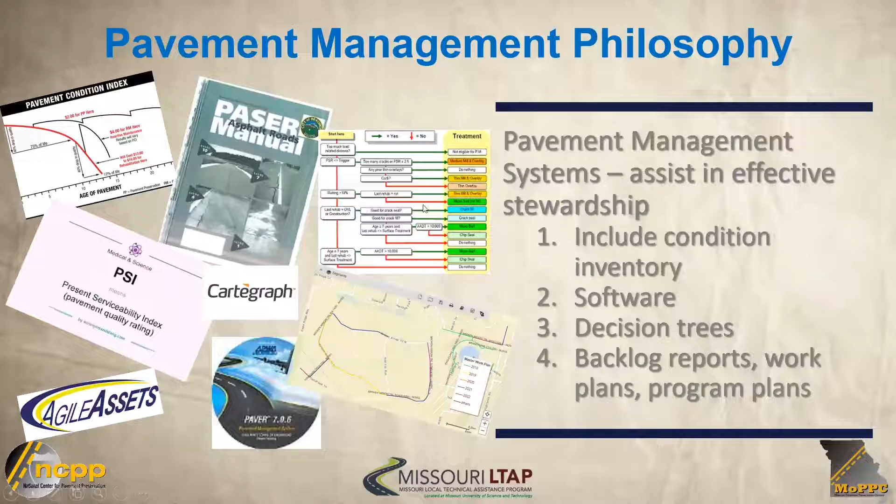In fact, in Florida, we already had a webinar to cover this exact thing. There's a lot here. For those of you who are low and moderate, just understand that there are certainly a lot of different systems, whether that's kind of the early PASER model, which is that 1 to 10 scale. You've probably heard of the 0 to 100 PCI, or pavement condition index. And then you've probably heard of some of these proprietary systems, or what APWA has, which is called PAVER, used to be called micropaver. So you're going to hear all about this, but it's really there as a tool to help you inventory the condition of the pavements. Now, some of these get into more of a decision tree, where you can build that out yourself. Some of them get into backlog reports and help you plan and program for the future.

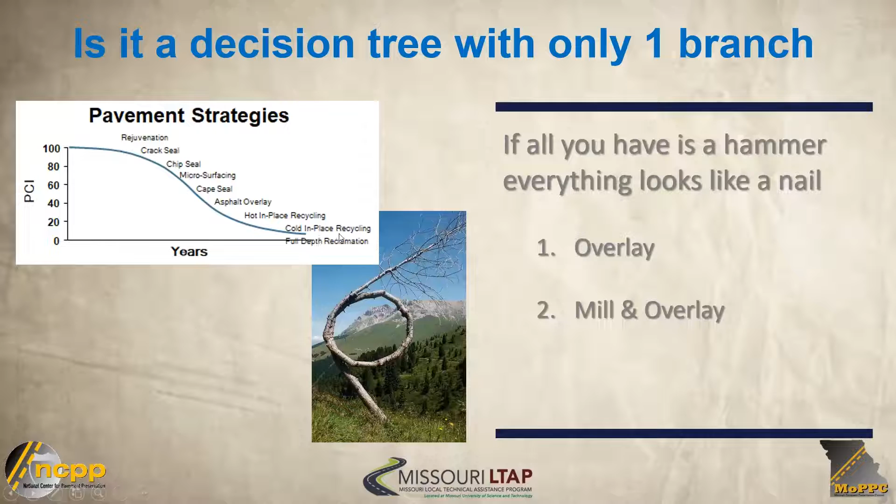Here are some strategies you might see along the entire deterioration curve. You'll see us talk about this curve - you get way up at the top where you have more preservative, aggressive strategies to preserve the pavements, all the way down to the bottom of the curve.

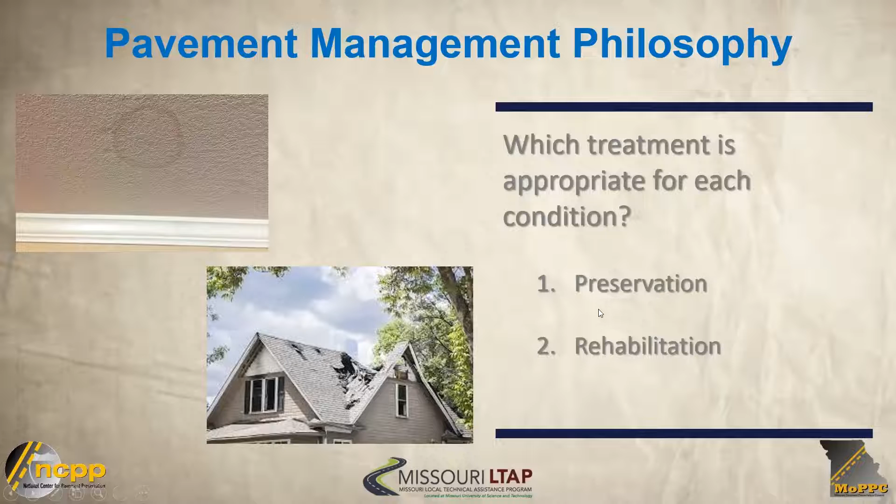So which treatment is appropriate for each condition? That's what we want to know. When is the best time to address a leak in the roof? Is it when you see a little water stain, or is it this situation? What we want to catch is right here - it's a lot less expensive, a lot less intrusive, and doesn't affect the public nearly as much. So that's where we want to live, putting a tremendous amount of effort into the preservative side. And then obviously we're going to have some where we have to do rehabilitation.

But it's something we all understand, right? If your kids bring home a 55, you know what that means - they're grounded. But you know what that means in relation to a 90. It also helps, in essence, not only with making sound treatment decisions, but also helps us communicate with elected officials, and we need to be able to do that.

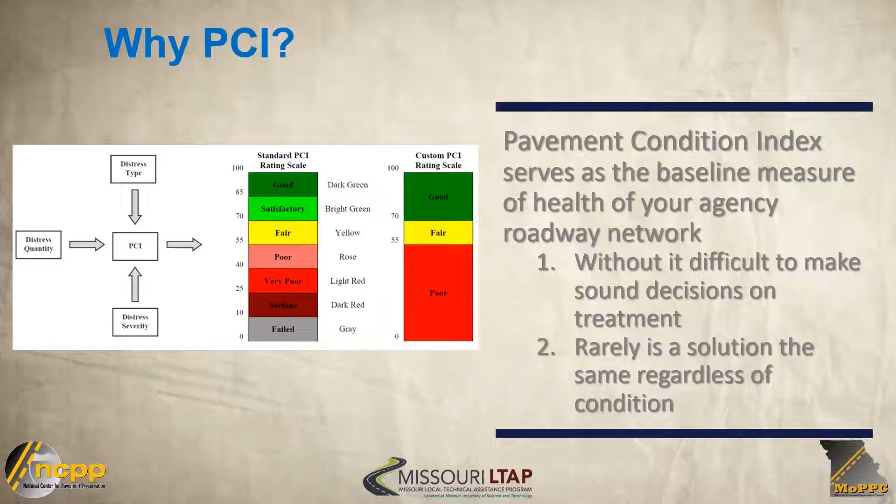That's very important. Rarely is a solution one size fits all - that's something I talk a lot about. I love this Peter Drucker quote: 'What gets measured gets managed.' That's what we want to do. If you're not measuring your network, you're really not adequately managing it. So one of the things we want to focus on is implementing specific measures and setting goals.

Know your paving cycle - it's one of the easiest things you can do. To calculate that, just take your normal resurfacing budget - let's say it's $1 million - and divide by the number of lane miles you have. And if you have to tell Mrs. Jones that her road, assuming the normal resurfacing budget, won't get resurfaced until star date 2163, then you know there's a problem.

You want to know your network level at all times, as much as you can. Then work with management and elected officials to set that minimum network condition target. Do you want to be at a 70? Are you at a 60 and want to get to a 70? You definitely don't want to stay at a 60 - that's the terminal threshold, which Larry's going to get into.

Then really determine the funding levels required to hit the targets. It's one thing to set a goal, but what we want to focus on is the targets to get to that goal. That's how we need to set that.

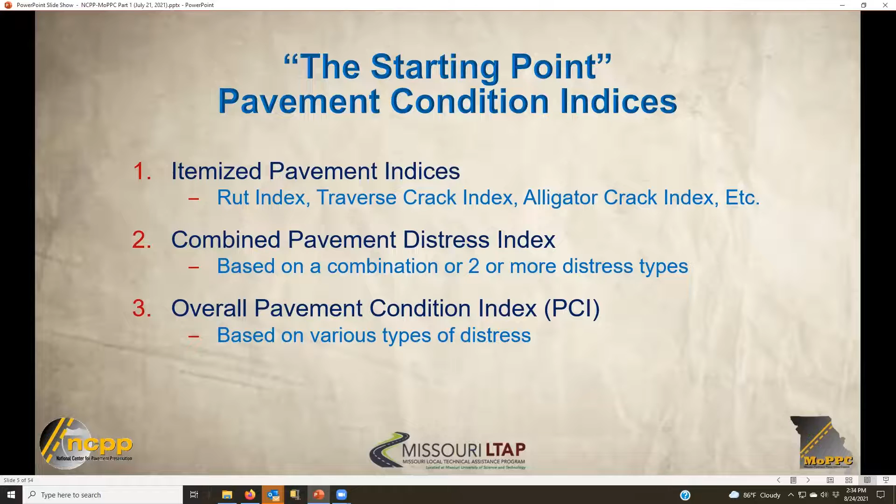There are rating systems out there. I'm not going to take away any of them, but some of them are probably a little outdated. For example, the PASER system was developed by the University of Wisconsin. I remember years ago going there and listening to how the PASER system was set up. I thought it was a good system to begin with, but as time rolls on, we got to look at things a little different.

Their rating scale goes from a 10 to a 9. They're saying no maintenance is required. Well, maintenance can be required from day one. So to say you'll never get maintenance if the road is new, that's a misnomer.

The other thing is they're saying cracking and minor patching, that's an 8 to a 7. Well, where does that all fall into? Because that's a little different. Preservation is about the midway point in that system, a 6 to a 5. Well, you're not going to get ahead with preservation if you wait until the road is too far deteriorated. You want to do it early. So, that system had a few problems.

Then AASHTO came up with a couple systems. They came up with a PSI and a PCR. The PSI was based on ride and rut and cracking and patching. Well, there's a little bit more to it than that. You're talking about relegating the roads to just a few numbers, and that was a 5 down to a 0, which a 5 is excellent. 0, as I have on the screen here, it's essentially impassable. Well, we don't necessarily have that many roads that are totally impassable.

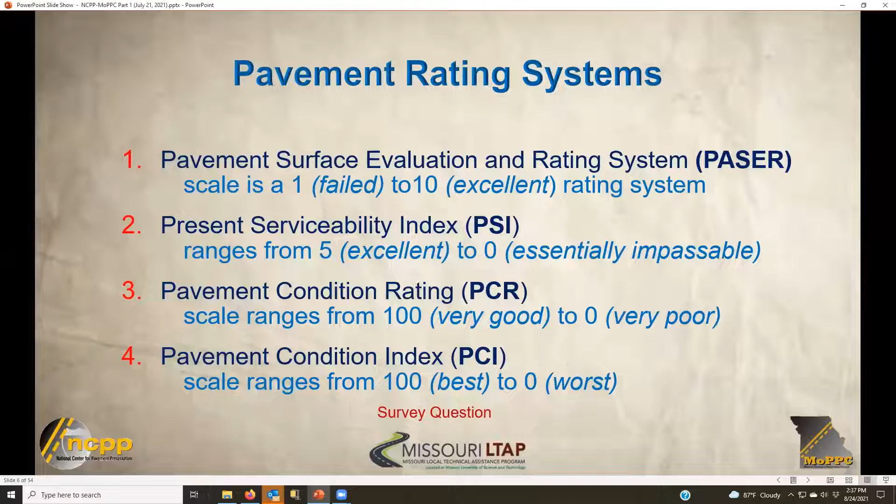Okay, let's move on, and we'll come back to that question in a minute. Let's talk about the advantages. Oh, are we getting some questions up there? No, you're fine. Keep going.

All right, let's talk about some of the advantages of a pavement rating system. Obviously, a lot of us can remember an awful lot of things about our roads. When I was with the state of Michigan, there were an awful lot of roads I could remember the condition to, but you start thinking about it, you lose track. So you got to have some way to rate those roads.

So anyway, let's talk about the whole advantage of the rating systems. Better communication. We can set up a threshold value for when things are starting to go to the point that we're at a point of no return. That's called our threshold, and we'll get into that a little later. We can sort and rank our roads. We can also rate the deterioration performance. It helps us track some of the designs.

There's a lot of reasons to have a pavement management system. In the old days, maybe you could write it down on the back of a piece of paper and keep it in a desk drawer. You can't do that anymore. We have just too much to take care of, and there's just no way in the world that you could possibly be able to rate your roads with a system of scratching on a piece of paper anymore. So you've got to have some sort of rating system, management system.

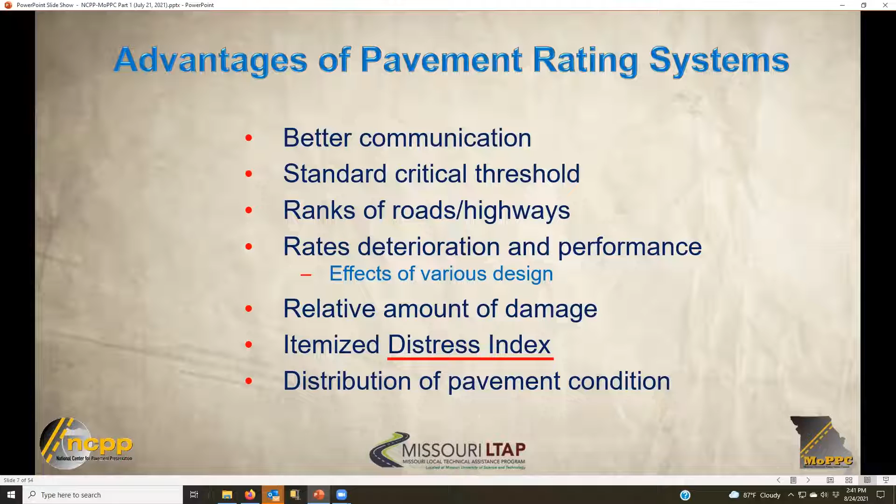Again, they all use some sort of itemized distress index. That's so important with every one of them. And we're going to use them in this new approach I'm going to show you.

Here's a problem that you've all faced. You go to a city council meeting and you're trying to describe your needs to the council. These are the folks generally that are holding the money, and everybody wants a share of it. You have police and fire, water and sewer, development associations, and yet you're trying to describe your needs to people that really don't understand what you're talking about. And even once they're educated, the election cycle is such that they change quite often. So you've got your back to the wall trying to get your point across, but it's very, very difficult to do.

And that's the city. Now you go into a county and you're facing the same thing. These are the folks holding your money, and they're elected on a short-term basis most of the time. People want funds for new roads, but they also want planning studies. They want law enforcement. They want money for parks and reserves. It's a never-ending struggle. So how do you communicate with these folks without getting the deer in the headlights look?

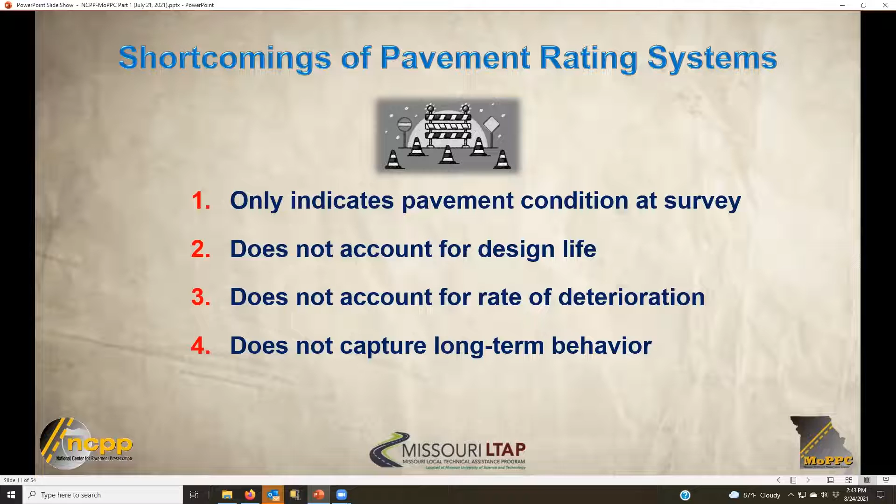One, it only indicates the condition at the time of the survey. It doesn't account for your design life. It doesn't account for your rate of deterioration. It doesn't account for long-term behavior. And those are all things that people want to know. So that's one of the problems with our existing systems.

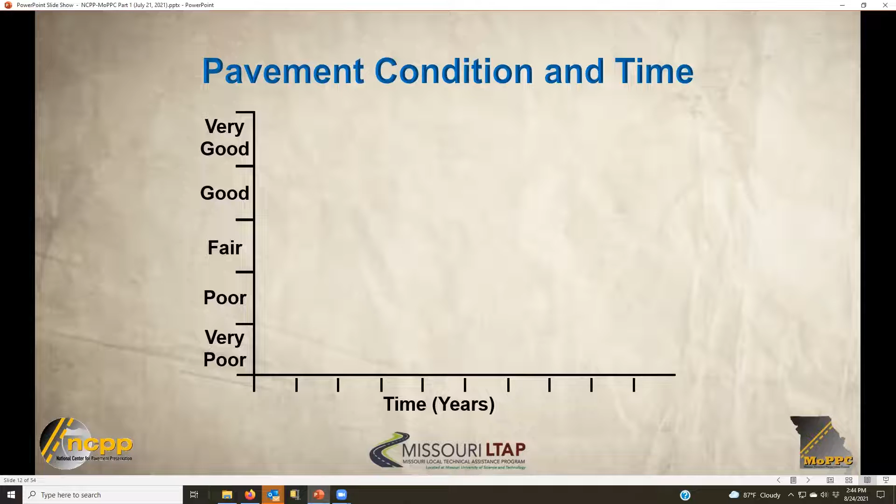And yet we can look at a typical deterioration curve over time, and it starts to make sense if we look at it in a different light. Here's your typical deterioration curve. On the vertical axis you have everything from very good down to very poor, and the time span in years is along the x-axis. But roads don't all take this form. This is just something somebody drew up, but every road acts differently.

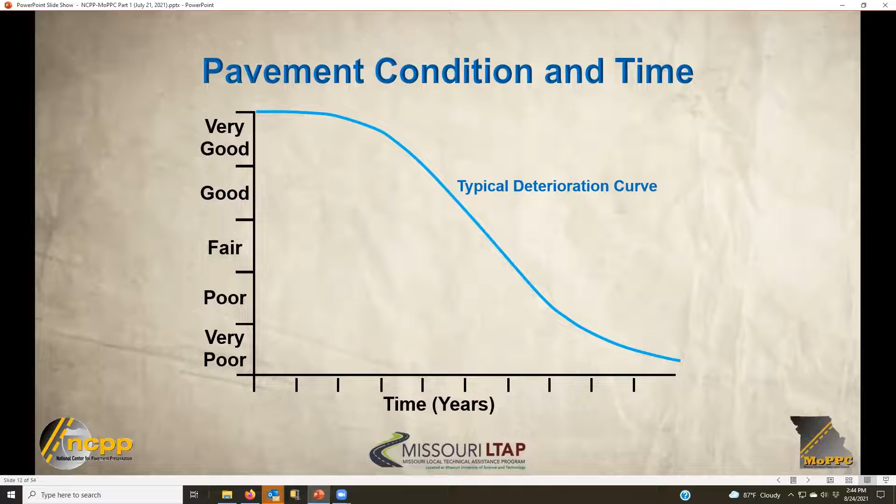We're getting some answers here. Let's take a look at it. Give you another couple seconds to jump on. This is what you folks are dealing with on a day in, day out basis. Where do you put your money? Okay, let's end the poll. All right, well...

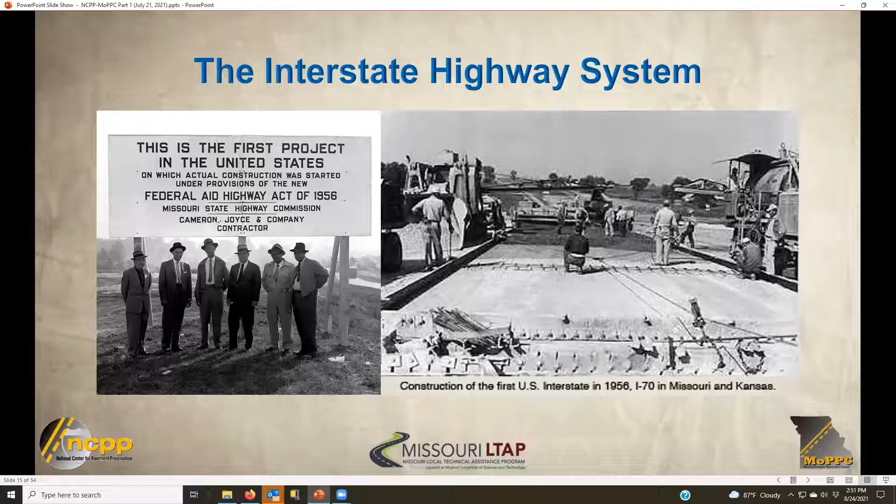Let's talk about lifespans. Everything out there has an average lifespan. People have an average lifespan. We tend to forget that roads have a lifespan as well. And it's important to think about this, but the only difference is that every living thing here, the life can be extended if we take care of ourselves and get proper medical care. But here's the other thing.

These can almost last forever if they're properly constructed and maintained. I had a discussion with Buzz Powell a number of years ago - Buzz is at NCAT, and many of you have heard of him, maybe some of you know Buzz, very nice individual. And Buzz was telling me that, you know something, our roads could last forever if we took care of them. Think about that - if we did the proper preservation techniques on our roadways, they would last forever. And right now, NCAT is doing some studies, and they're showing that preservation treatments last far longer than anybody ever anticipated, and they extend the life far more than anybody ever anticipated. So it's very, very important to think about our pavements as far as a thing that has a life, a pavement life. And here's the analogy.

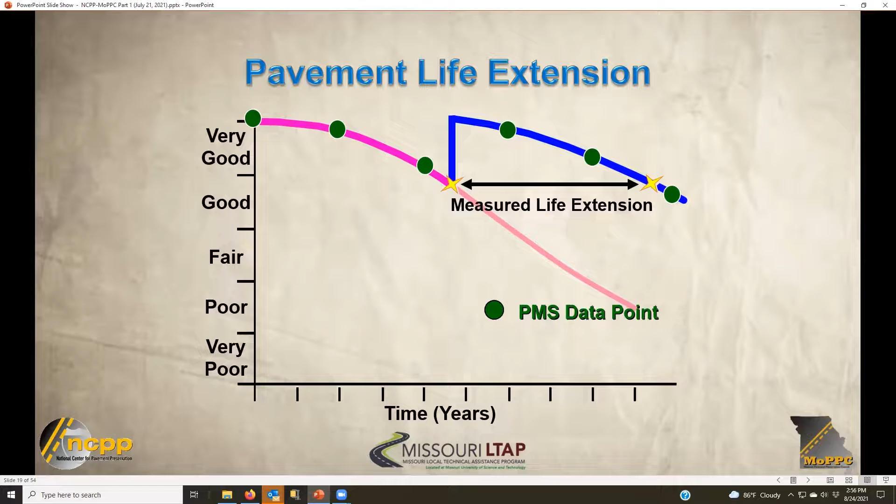So it's not a pie in the sky idea - it's really something that can be measured. Now, these have been measured, and you'll see the measurements and averages posted in this report. It's an NCHRP report, actually through SHRP 2, the Strategic Highway Research Program, the second part of it. And there's a report out there.

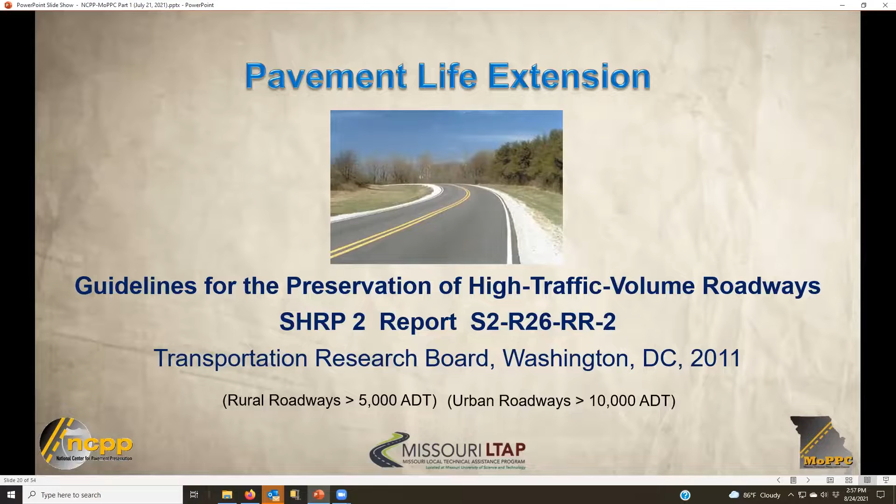Here's one of the points I want to make: your treatment life is not the same as your life extension. Your treatment may give you an idea, but think about a rejuvenator - you'll spray a rejuvenator on the roadway, and after they're gone you'll say, well, what did that do for me? I don't see any treatment life there at all, except it's just extended your pavement life another 3 to 6 years.

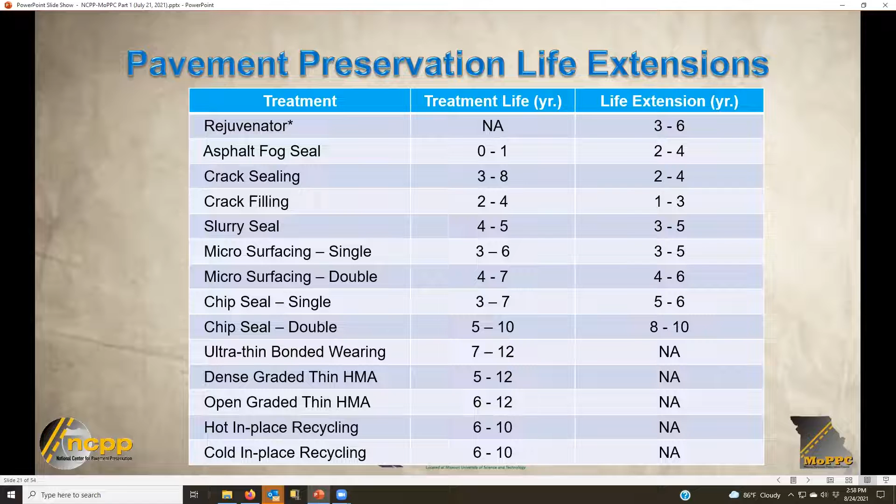A crack sealing operation, as opposed to crack filling - you'll seal up the roadway, and maybe that sealant holds good on your roadway 3 years, maybe as long as 8 years. But your life extension, what did it actually give that pavement that the crack seal was put onto? It might give you 2 to 4 years. You can see it's different all the way down through there. So think about life extension, not how long the treatment lasts - we're really putting it on for the underlying pavement.

So what is remaining service life? Well, it's the years until reconstruction is needed without any kind of preservation actions. So it's a function of your deterioration rate and your distress indexes, and there's all kinds of indices you can use to look at your pavements. Like I said, only look at the ones that are killing you first.

Let's talk about the advantage of remaining service life. Well, one of the things is it overcomes the shortcomings of the distress index. It gives you the rate of deterioration, and it takes into account what the original design life was. I think the most important part of remaining service life is that you can communicate effectively with your elected officials or lay people who don't know anything about your roadways.

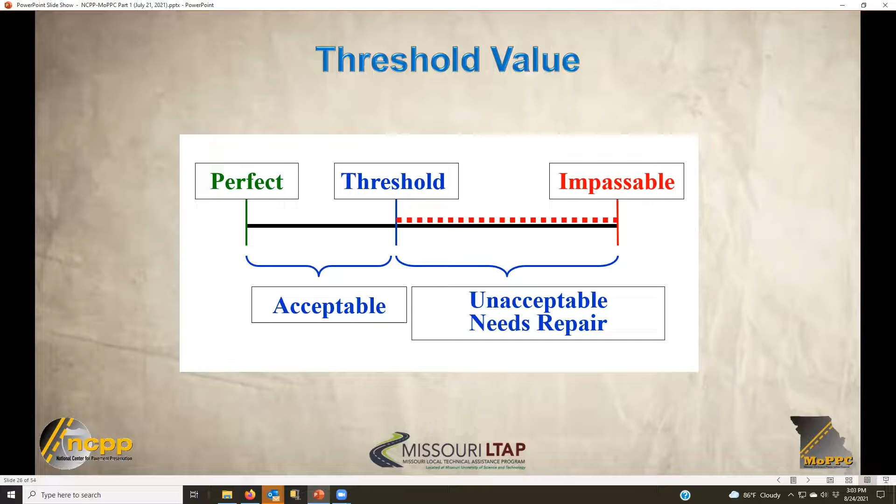Let's talk about service life, because definitions come into this. Design life is, if you've got a 20-year design, that's the time from when it's constructed until it hits your terminal condition. So if you have a 20-year design life, it should be 20 years until it gets to that terminal condition. It doesn't include any kind of preservation treatments in there—that's just design, and it's years for the design.

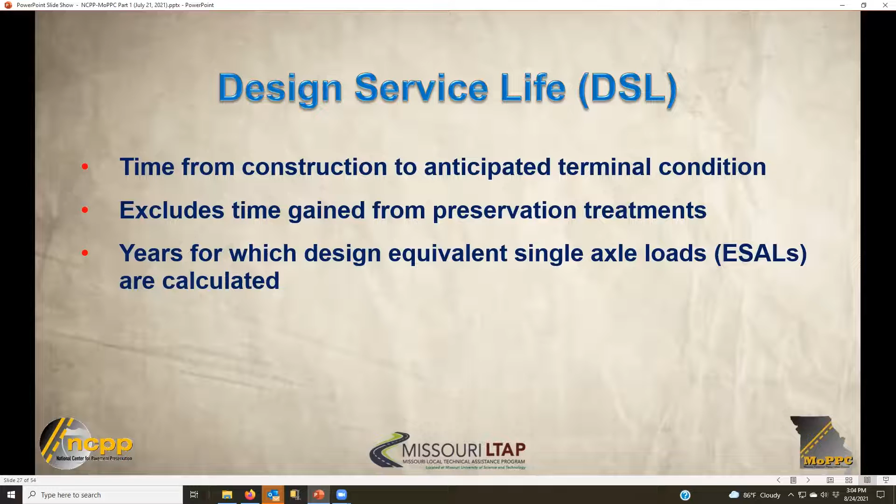They calculate your loading based on ESALs, and this whole design is really a structural calculation. I want you to think about design life as a structural calculation, because your roads can deteriorate if you don't take into account the environment. In the environment, more roads fail due to environmental conditions than they do from structural conditions.

Service life is the time from when it's constructed all the way to its terminal condition, and that includes your preservation time. So let's say you have a 20-year design life and I do a number of preservation treatments, each adding maybe 5 years, 5 years, 5 years—I've just got 15 more years on my design life, so I can keep going. That was what Buzz Powell and I were talking about: if we do preservation on these roads, we can keep them in good condition forever, as long as they're structurally sound.

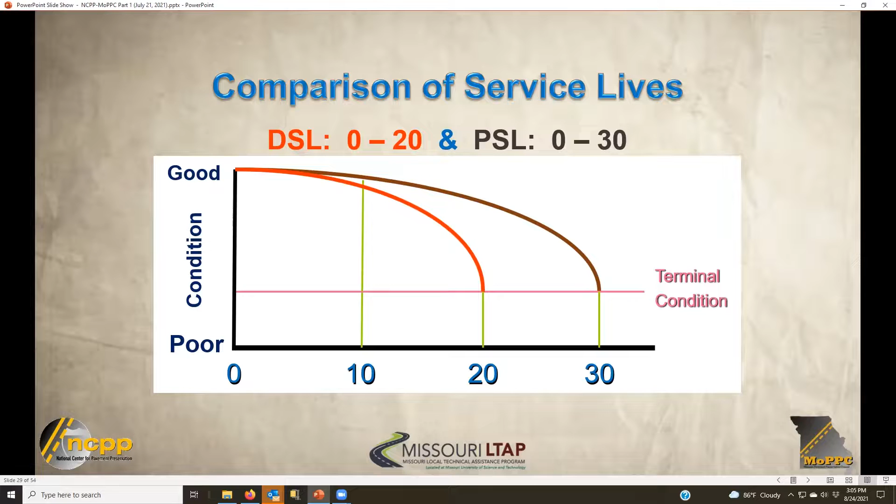So, simple graph. Here's my design life, 0 to 20. That's a red line. But yet if my pavement service life, and that's when I'm adding preservation, I can get another 10 years out of it. So these are definitions.

Estimated number of years of service after construction, that's my design life. Remaining service life, that's predicted number of years of service from any given date on that curve. The age, that's standalone, and then my service life is my sum of remaining service life plus my age.

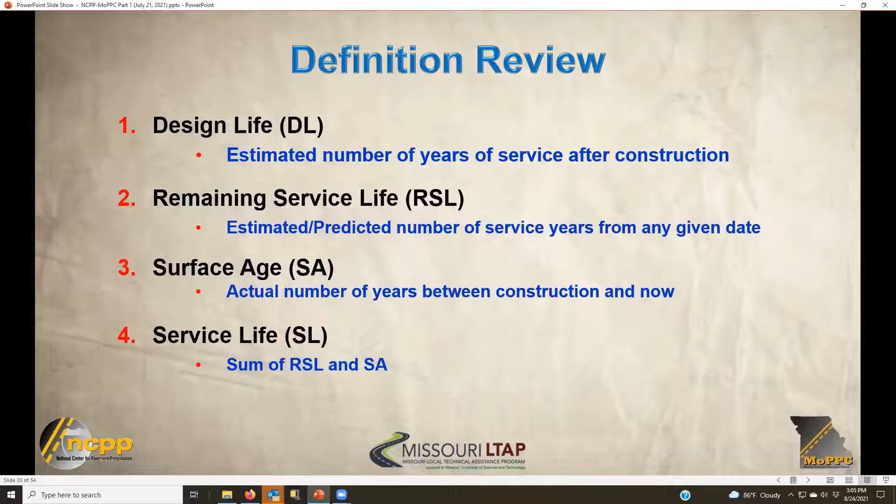Due to time, I'm not going to get into an awful lot of examples here, but this is not rocket science, folks. This is pretty straightforward stuff. Anybody that can add, subtract, multiply, and divide can probably work on this. Now we can get some sophisticated algorithms that can really take this apart, that can be very sophisticated, but the whole basis of this is pretty straightforward.

So here's an example. We have this road rated from 0 to 100, 100 being perfect. I like that because everybody can understand it. We want to make it simple. You go to school, you get 100 on your paper, you got a perfect paper. Let's just say the teacher says you're going to fail anything below 60. Well, threshold is 60. We set it wherever we want it to be. Just like the teacher could make your threshold at 70 or could be a 50.

It was built in 2010. Well, that means 11 years old, and your distress index in 19 was 75. So estimate your remaining service life and your total service life.

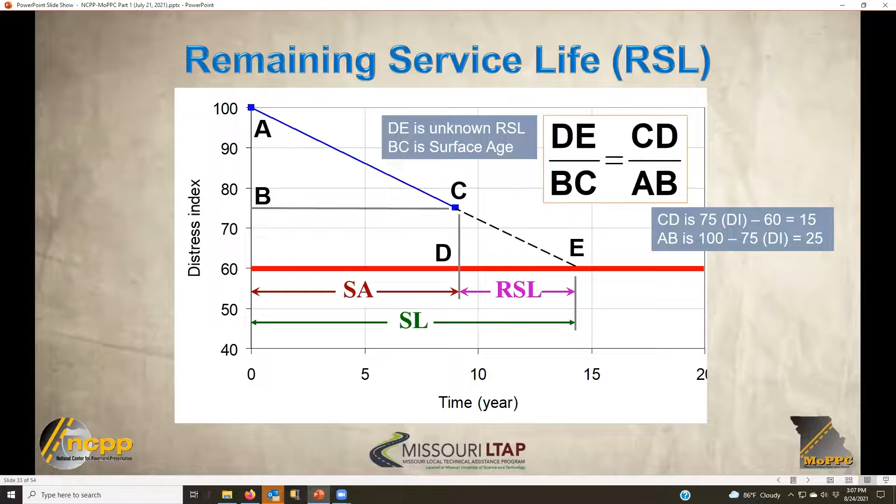Okay, it's just simple triangles, and I won't go through all the math here. It's just proportion, that's all it is. But this will be up on the website. Here's the calculation, simple proportion, and you'll need a minute to kind of let it sink in, but it's nothing difficult about this calculation.

We can get more sophisticated. We can get into each one of the distress indices. And in this case, maybe we're looking for alligator cracking, which is a structural distress. We'll talk about it the next time we meet, and about those distresses that you don't do preservation with. You have to make repairs before you do preservation in that case.

But this is 0 to 100, threshold is 60, maximum allowable extent. And this is where your group of 3 or 4 people say, how much alligator cracking will I say that the road can have before it gets to a terminal condition? Well, my low severity, those real fine cracks, real tiny ones, I'll allow my road to have 100% of those. But my medium severity ones, maybe those that are 1/8 inch wide, in that vicinity, maybe only 50%. And the high severity ones, the ones that everybody associates with alligator cracking, I'm only going to allow 10% of my road to have.

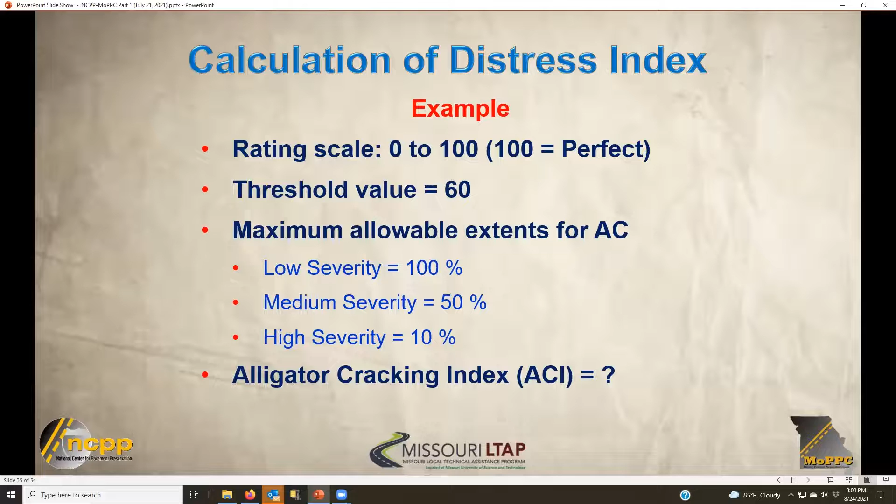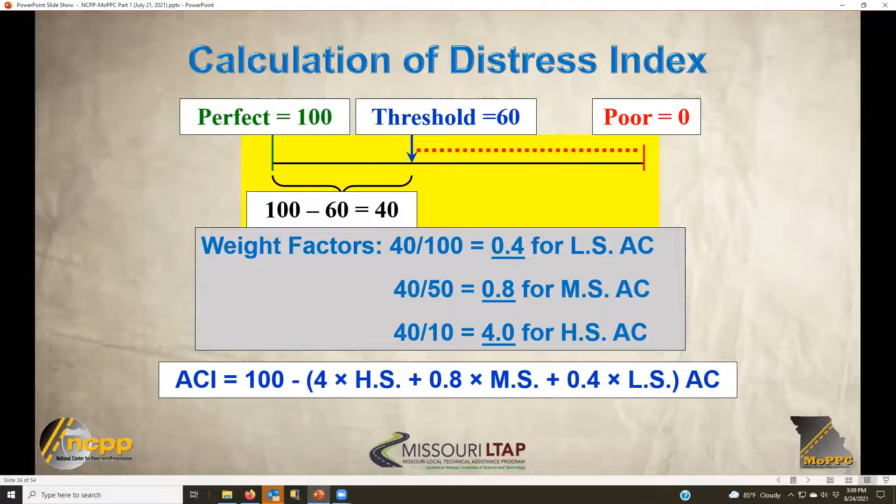So what's my alligator cracking index? Well, these are the calculations, and I'm not trying to have you memorize all this right now, but I'm just trying to show you that it's not rocket science. Every one of you out there can do these calculations. It's pretty straightforward.

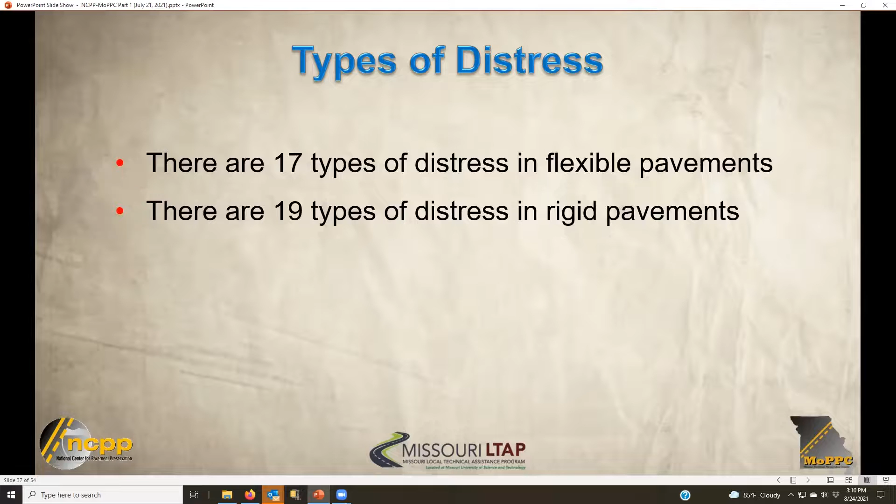Now, remember I said, don't go out there chasing all these distresses, because did you realize there's 17 types of distresses in your flexible or asphalt pavements, and there's 19 types of distresses in your concrete or rigid pavements? You're not going to need to chase all these distresses because they don't happen in your area, all 17. You're not going to see them. The distresses that Chris is going to talk about in Florida may be different than what you have in Missouri, which are different than maybe what they have in Oregon, and certainly different than in Alaska. Only go after the distresses that are killing your network first, the ones that you see day in, day out.

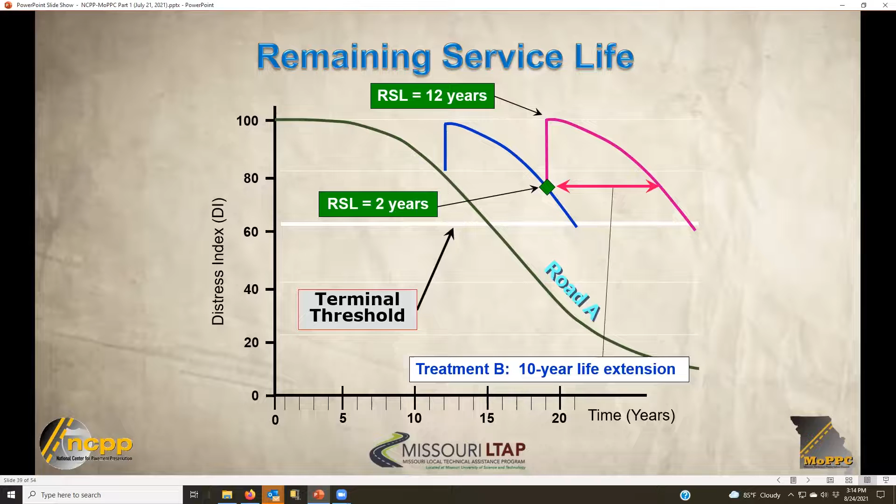Here's the magic: instead of this road doing nothing, crashing and burning, and hitting my terminal threshold at 15 years, by applying 2 treatments, I've extended it out—doubled its life to 30 years. It's not rocket science, folks. We're getting on them early, putting a treatment on them, and extending the life, and we can get a lot more life out of that road.

And if we start farther up the curve, where maybe we've got almost a 12-year life extension, and we put something very light on it, we might be able to keep that road alive almost forever if we start early enough. So that's the whole point.

Remember this about preservation: if you do it too late, it's a waste. You're throwing money down a rat hole. If that road is down to the point of no return, you're just wasting your money. You've got to put the treatments on early—the right treatment, on the right road, at the right time.

That's a mantra. So now let me give you something all of you can use, and this is how you talk to your elected officials. A number of years ago I came up with this, and Jim Sorenson, a great friend of mine who was team leader at Federal Highway, also really believed in preservation. We developed this quick check of your highway network health, and I want to show you how it works, because all of you can use this to make your case to your elected officials or to someone who doesn't understand what you're trying to achieve. It works, and it's been proven by many agencies around the country—a lot of local agencies use this to make their point to elected officials.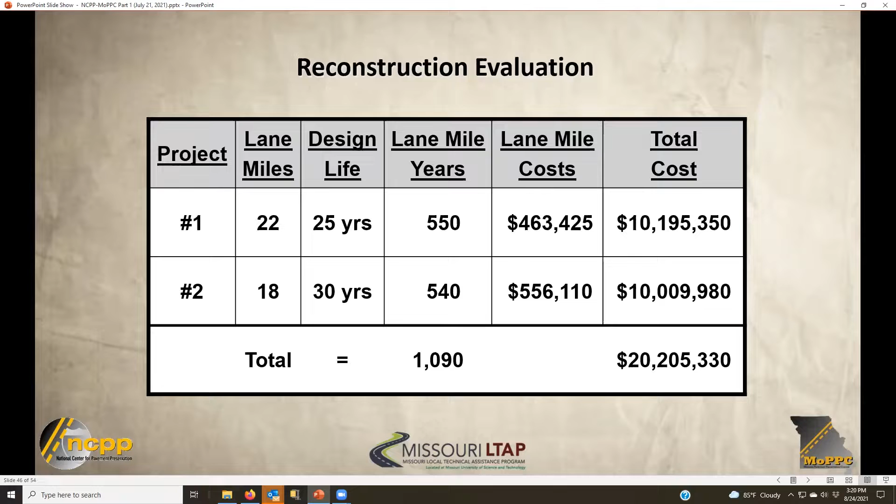550 lane mile years. Lane mile years - remember this last one here? Each year we lose 4,356 lane mile years. Project number 2: 18 lane miles, design life 30 years, 540 lane mile years. My cost: over $20 million.

Now I'm going into my rehabilitation - the same thing, rehab is just a shorter design life. Well, we can look at the definitions. One thing I'll tell you about rehab: some states will call a project a rehab, while another state might call it reconstruction. So these definitions are not consistent from state to state to state. They're different. But let's just say these are rehab projects.

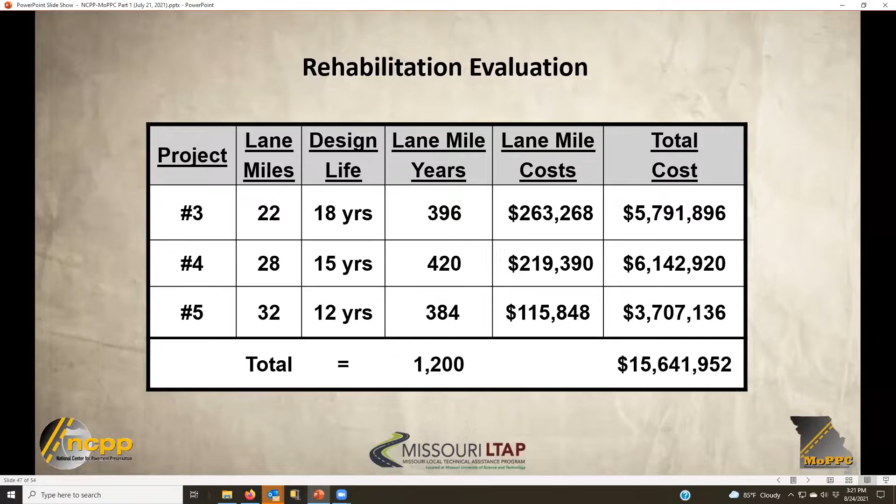Lane miles 22, design life 18 - you get the point. Lane mile years, that's what we're really looking for. The cost of rehab is a little less, $15 million plus.

And now let's look at preservation. I'm not talking about design life here, I'm talking about life extension - doesn't matter if it's 2 years, 3 years, 5 years, 10 years. You see what happens, my lane miles multiply by 2, I still get the same units, lane mile years. So I've only spent a little over $1 million.

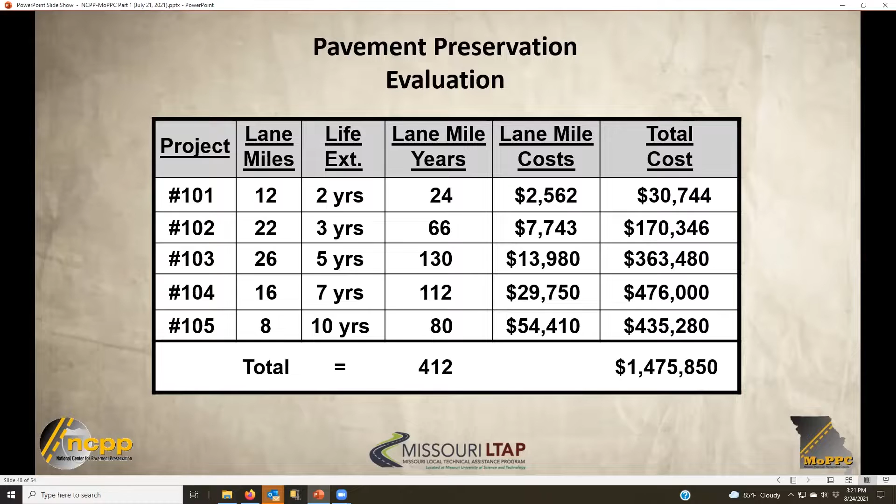So let's tally some stuff up here. All right, my reconstruction: I've got 1,090 lane mile years. Rehab: 1,200 lane mile years. Pavement preservation: only 412 lane mile years. 2,702 total, when I tally it up, I spent $37 million. This is my costs, nobody would argue with that. Matter of fact, on some of the preservation treatments, I can probably put a penny sign down there in proportion with the others, because some of them are very inexpensive.

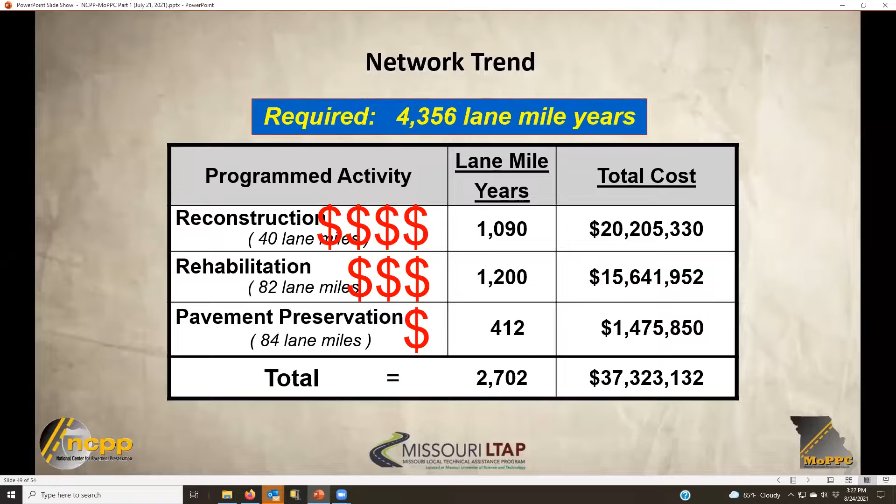So this is what you're all facing, folks. My network size is 4,356 lane mile years. All my programmed activity - see this, 2702? That means I'm running a deficit.

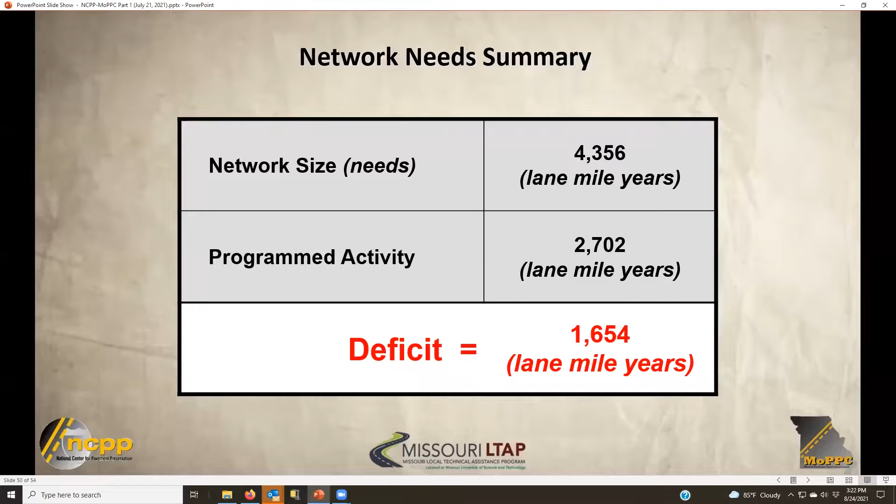I'm corkscrewing my network in the ground. It's getting worse and worse every year because I'm focusing on the worst first, like Chris was talking about. This is why we talk about preservation. This is what you have to think about.

Maybe your reconstruction can't be 40 lane miles this year. Maybe you can find a break point - you're going to do 31 lane miles. And maybe your rehab is not going to be 82, it's going to be 77 lane miles. And maybe by doing this, I've just saved a ton of money - I've saved $6.1 million.

So what I'm going to do is take that $6.1 million and start putting it into some preservation treatments. I'm still doing some reconstruct, still doing some rehab, but I'm going to take a lot of that money and put it into preservation.

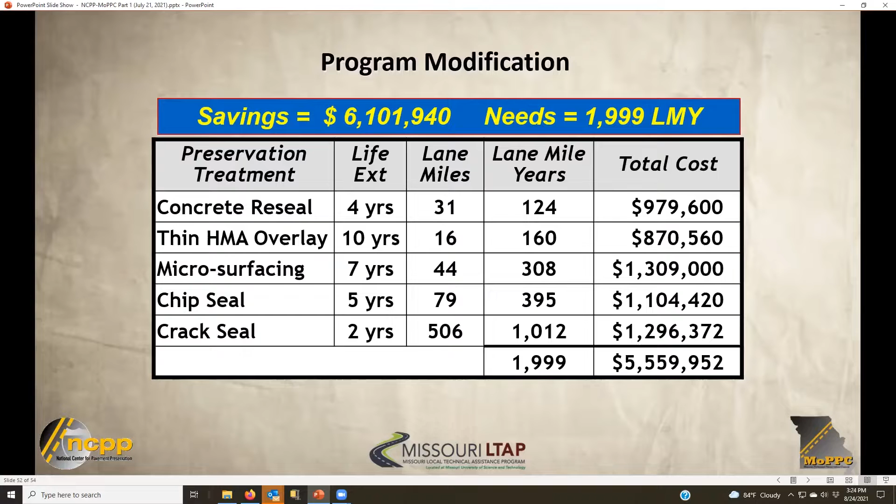And why? Because I don't want my network to get worse every year. And if I take my life extension, my lane miles, and crank up the number of lane miles I'm doing in preservation, guess what I got? Lane mile years. Add them all up, and you know what - it balances out.

Because now I'm still doing some reconstruct, still doing some rehab, and I'm going to do a whole lot of preservation. And guess what? My network is not getting worse overall. It's not really improving yet, but I've still got a net savings now of over $500,000.

And maybe I want to do another lane mile of reconstruct, maybe pour it into preservation and start. If your numbers actually start to improve - in other words, your totals down here are greater than what's required for your network up here - you're improving your network condition. If this number here is smaller than what your network needs, that means you're corkscrewing your network in the ground.

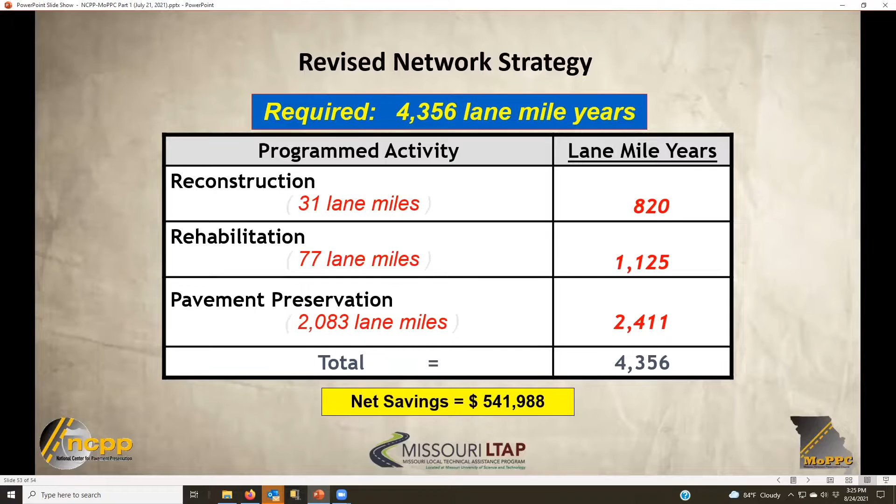It's a simple calculation. You folks can do it all very simply with what you know.

It works on any network. You can do it on a city, a county, your interstate systems, your state routes, your secondary routes, your boulevards. You can divide them up any way you want, or take your entire state network. I've done them for the states, and most of them are corkscrewing themselves in the ground.

You can evaluate your reconstruction, rehab, and preservation. It incorporates your design life and your life extensions.

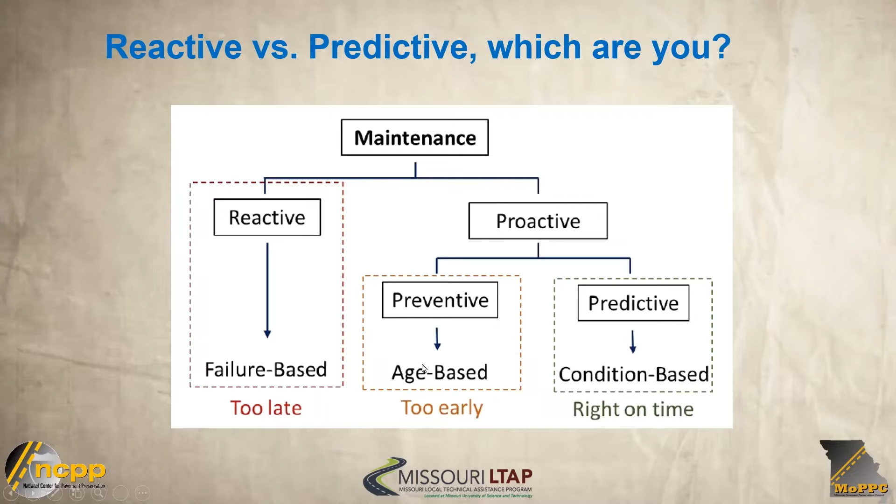So when you want to do anything with your fixed assets in your network, it's always better to get away from reactive, which is worst first, and go proactive - predictive, condition-based, which is what Larry's talked about, right on time versus too early. Too early costs us money too. Worst first is the least favorite of our possible scenarios, and this is why.

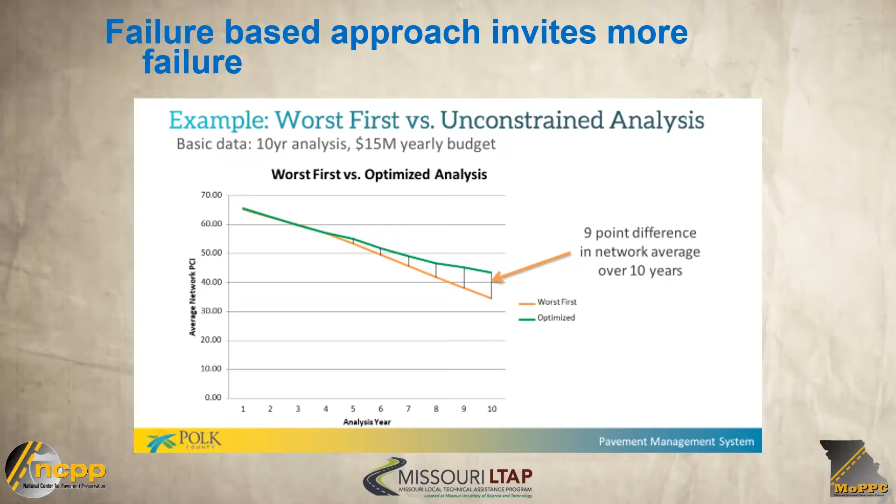What that enabled them to do was gap the worst-first versus the optimized approach. This is a 9-point PCI difference over 10 years. That may not sound like a lot, but they have almost 5,000 lane miles, so it's a huge network.

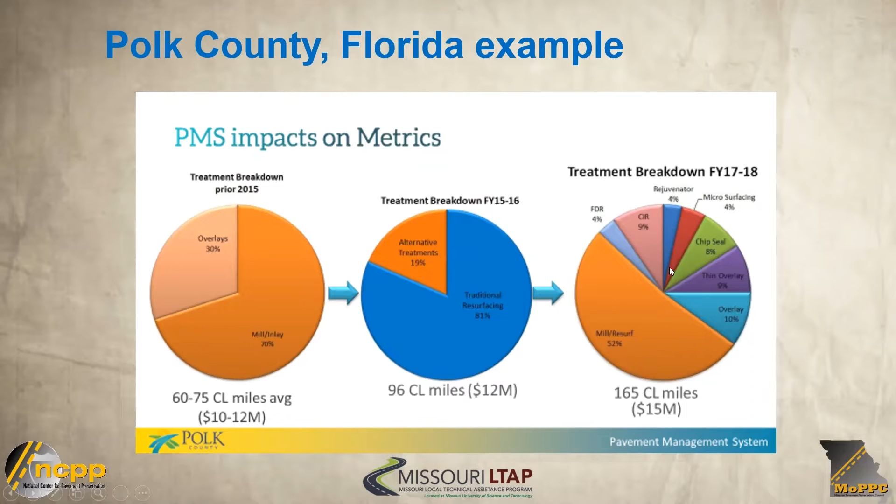Based on the impact to their budget, when they were just doing worst-first, county-wide, they were treating anywhere from 60 to 70, 75 centerline miles with their 10 to 12 million. That increased when they implemented top of the curve. They did some rejuvenation and some micro, and then got very aggressive with diversifying their portfolio, to where they are now they're really at that 65-35.

Now notice, this still means 65% of their budget is on rehab and some overlays. You can see minor and major rehab and reconstruction still takes up the majority of their budget. But they've really come to the realization that the rejuvenation, the microsurfacing, the chip seal, the cold in place recycling—some of these alternative processes—are very, very effective and efficient.

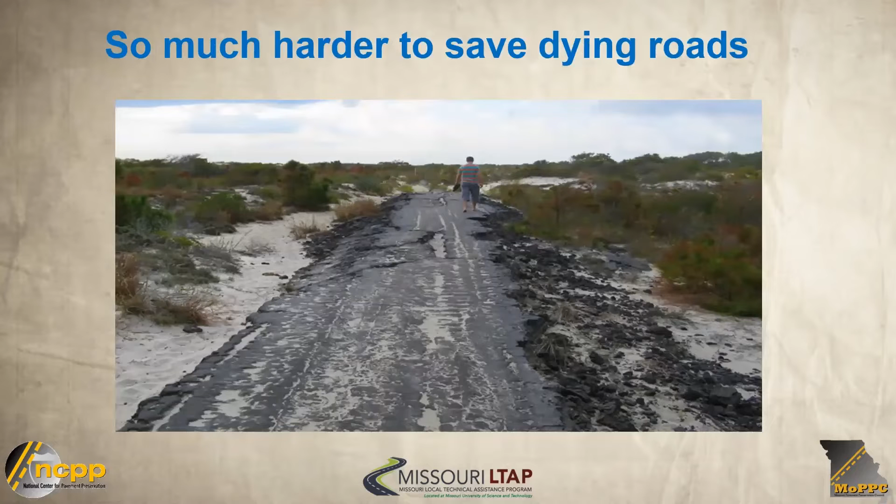And so now they can get close to that 200 centerline miles addressed per year. Again, it's so much harder to save the dying roads, and it takes a lot more money and effort than to just keep the good roads good.

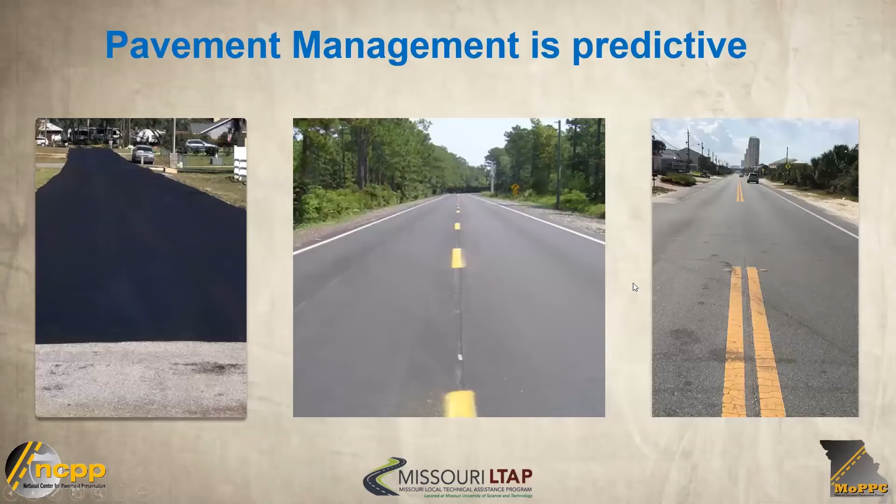So if we can use these different processes, whether that be micro or chip seal—this is a cold in place recycling candidate—we're going to get into that in module 4. I just want to tell you again, modules 3 and 4 we're going to get into these specific treatments. Module 2, we still have some other exciting things to go through on the planning side.